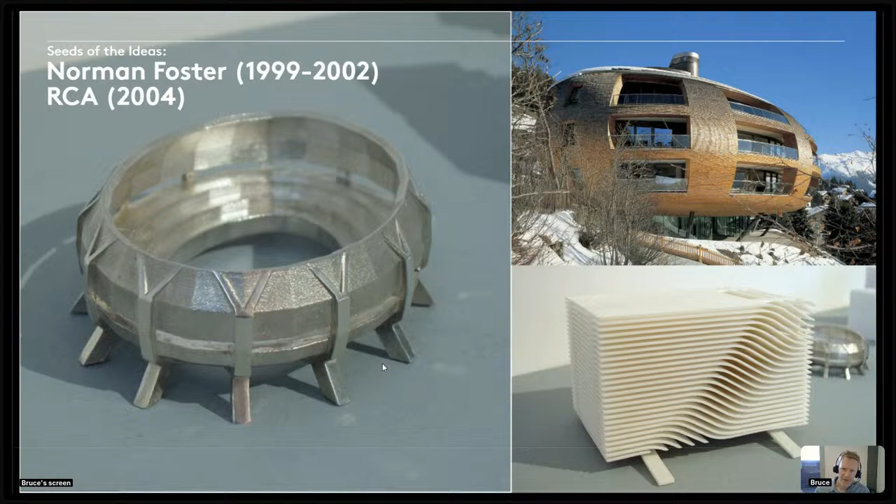So I'll talk to you a little bit first about how we got started. I actually originally trained as an industrial designer and started working on products and manufacturing processes in my BA. But my first job was at Norman Foster's Architects in the late 90s. I was there for a few years using digital design, digital tools within the studio. This was one of the first projects we worked on, the Chesa Futura project in St. Moritz, which was probably one of the key projects for me - digitally designed, digitally manufactured, in this case in timber, residential as well. So this was maybe just the start of some of the ideas that were tinkering around my brain.

After Norman Foster's, I went to the Royal College of Art, where I was making products, components, experimentations and sculpture as part of the design products course there, all around experimenting with digital manufacturing techniques. After the RCA, I ran an architecture practice for quite a few years, a very traditional architecture practice.

We decided at that point there were some opportunities for the use of digital manufacturing in homes. So this is me back in 2007. This is really the very first part of the process, where we built a proof of concept for using CNC manufacture for the production of homes, which was funded at the time from the GLA. We designed it all on the computer, manufactured it, and it came out pretty much exactly as we expected.

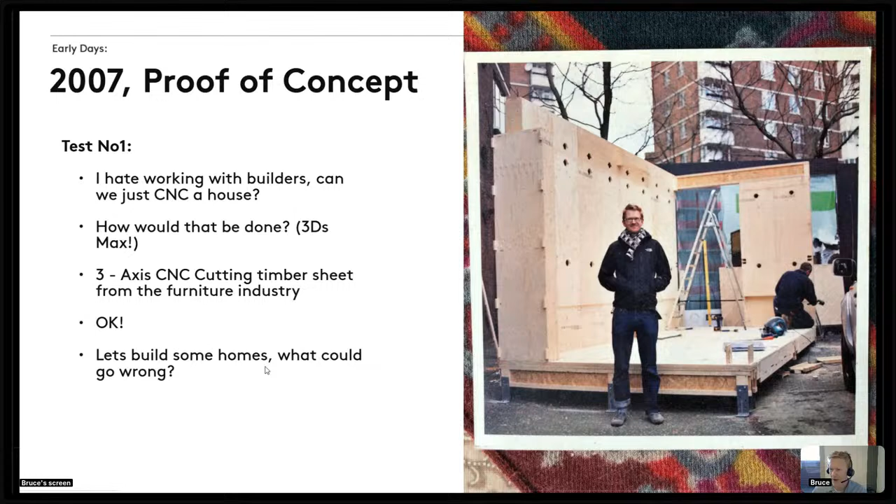From that, we decided we could try and make this into a business. We went out and got some customers, very much finding our way as we went, and decided to see if we could do it for real.

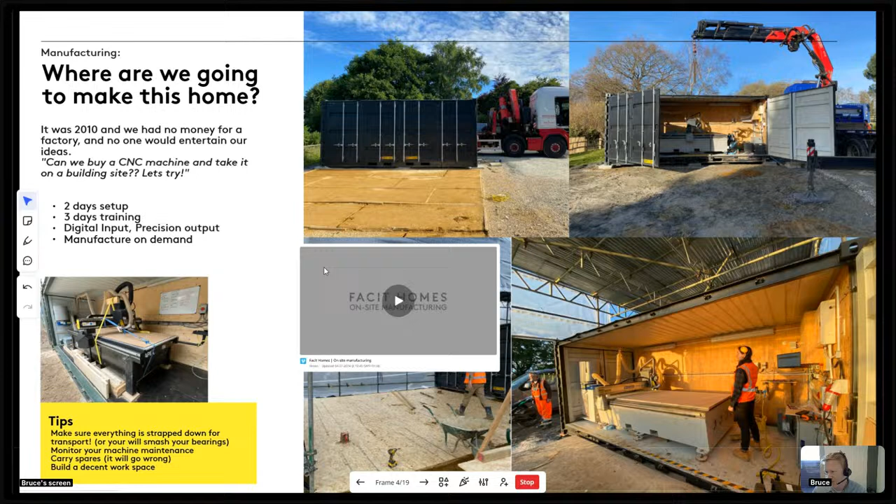Right back at the beginning, we didn't have a workshop or a manufacturing facility, so we decided to use this CNC manufacturing technology but bring it to the construction site, because we thought it would save us money on transport and shipping, and on rent for a factory space. So we've been using this on-site manufacturing process, and I'll just open this up if I can.

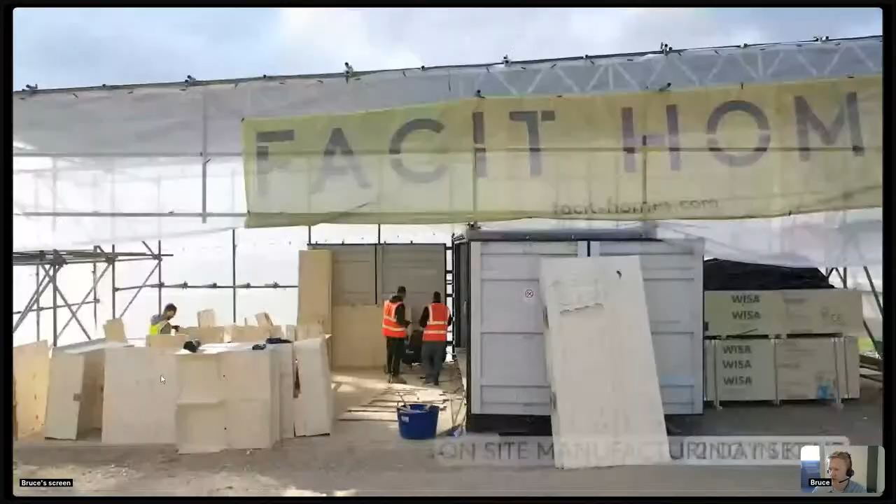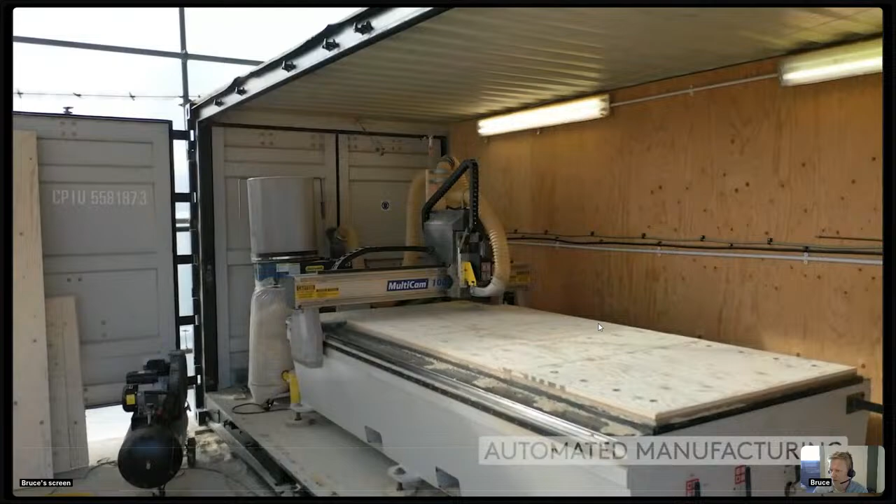The manufacturing process is: we bring the machine with us to the construction site, we drop it down, and it sits in a 20-foot shipping container. We bring the materials straight from the dockside, put them on the machine, and manufacture there and then, on demand. We're remotely operating and loading in the files from the design studio, cutting things out super precisely to 0.1 of a millimeter accuracy. It's really simple technology to use on site, so there's very little training needed, usually with low-skilled laborers.

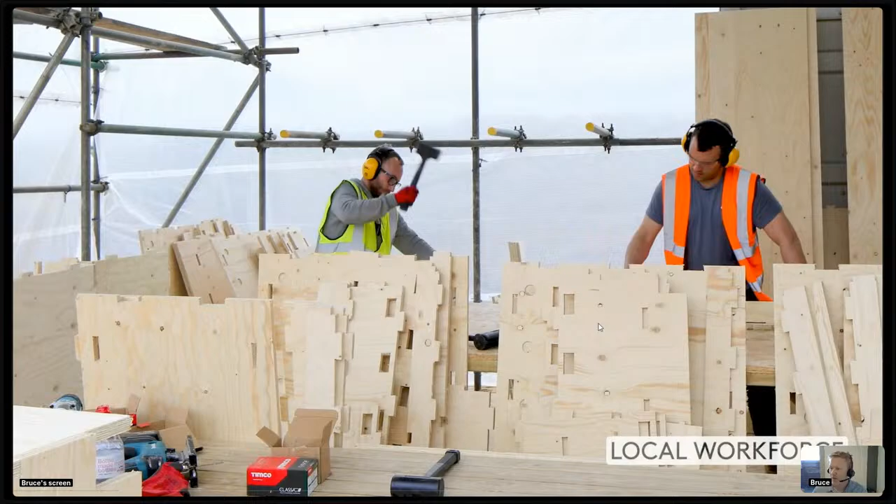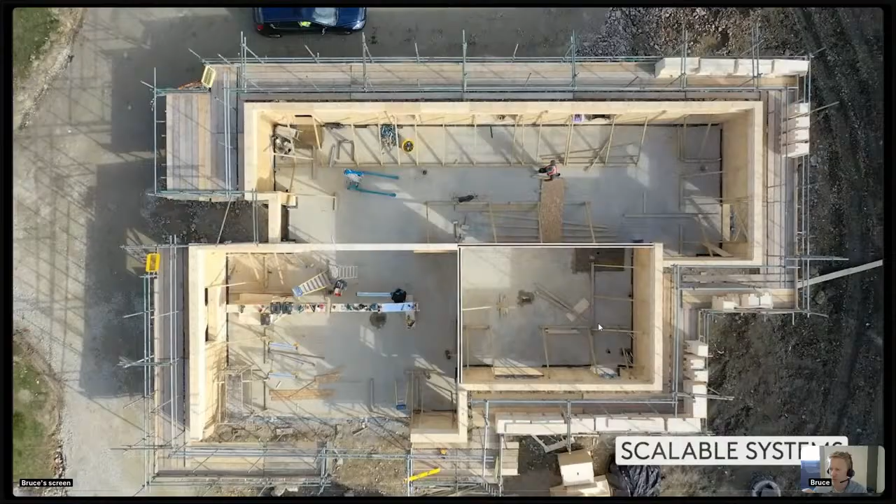We're building in a very traditional process where you manufacture and install, so you're working within the norms of traditional construction. We're very much interested in the transformation of normal processes with technology, rather than the kind of revolution where everything has to be done offsite. With this process, it's incredibly efficient, keeps costs down, and we reduce the amount of components held in inventory — we just go from machine to install.

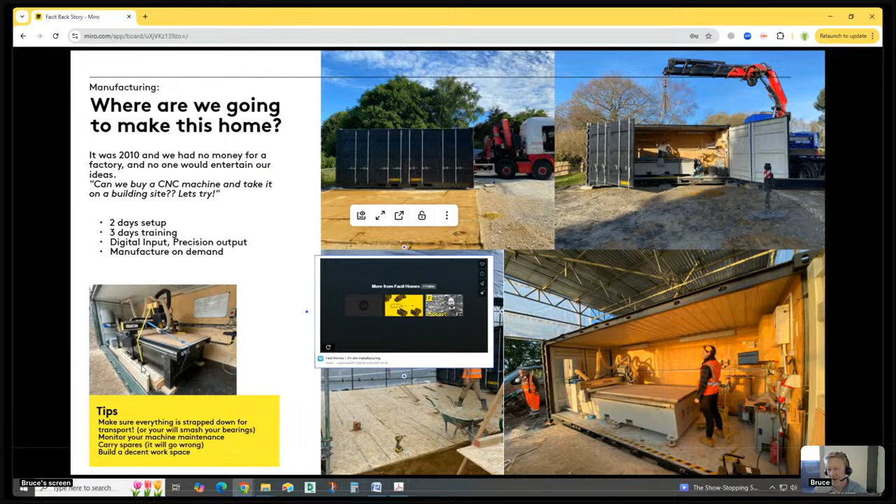This is the process we've been using on site really since 2011, and we have to deal with all the practical stuff like shipping and transport. The very first time we moved the machine, we found it had moved down the other end of the container, so we learned very quickly that you have to strap it down and make sure everything's secured.

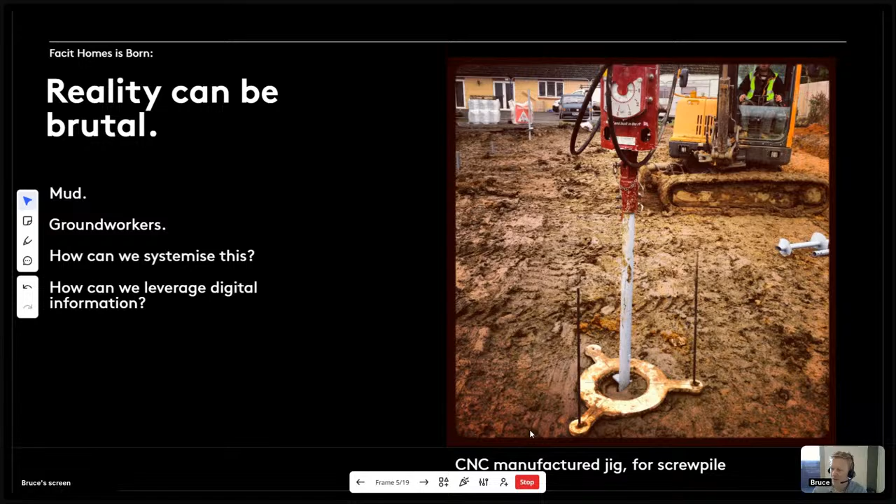From after that, other than the machining aspect, we've always had to deal with the brutal realities of construction — actually dealing with groundworks, civils and utilities. This is the jig that we made for the very first pile installation; we CNC manufactured a jig to see if we could guide the pile into the right place more accurately. We're constantly asking ourselves how we can use digital technology to improve the process.

The very first homes we did — homes 1 to 4, from 2009 to 2012 — were more collaborative working. They weren't always our designs; we were quite often working as a timber framer rather than having overview of everything. After that, the outcomes we found were quite variable — sometimes it would come out really well, and sometimes it wouldn't come out that well.

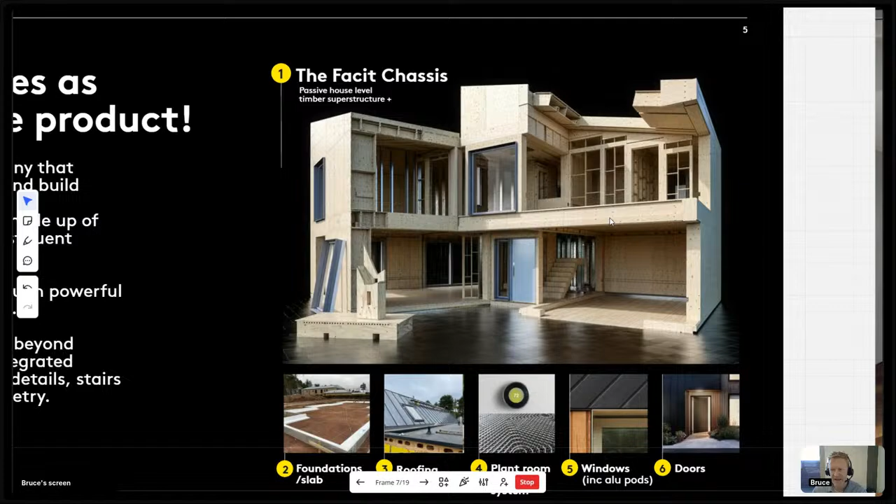So we decided at that point to take control of the whole situation and become contractor as well as designer and manufacturer. The philosophy we came upon was to add consistency, using the philosophy from my training as an industrial designer, to think of the home as a product. Every home is conceived as a holistic product, always made of the same fundamental components — same foundation system, same heating, same roofing, same windows, same door sets. In the middle, we've got the same superstructure — this is the bit we manufacture that we call the chassis, like the chassis of a car, ready for the components to fit to it.

And we reconfigure these components through the digital design tools that we use, so we don't have to have a standard typology. It's much more flexible than people kind of associate with the likes of modular construction, but it brings a lot of the associations in terms of accuracy, cost and management.

So this is home number 5, from 2013, which we really think of as the first proper Facit home. It's the first one where we were in complete control of the whole process. We had a lot of fun - manufactured cladding systems, a staircase, shading, fitted out the whole house ourselves, lots of custom made items in there. And it worked really well, both as a business and as an end product.

So off the back of that, we decided to try and grow this into a more established business. At that point we were using Revit, building information modeling, but we weren't particularly making much use of it. So we decided that we would try and make more of the BIM model than most architects would traditionally do.

And we set about producing what we call engineering grade BIM - really highly tuned manufacturing digital assets that you can go direct from the digital model into manufacture with the same data set. So a single source of truth, much more accurate in terms of how representative they are for the final product, down to the millimeter, as well as all the parametric aspects that come with the BIM.

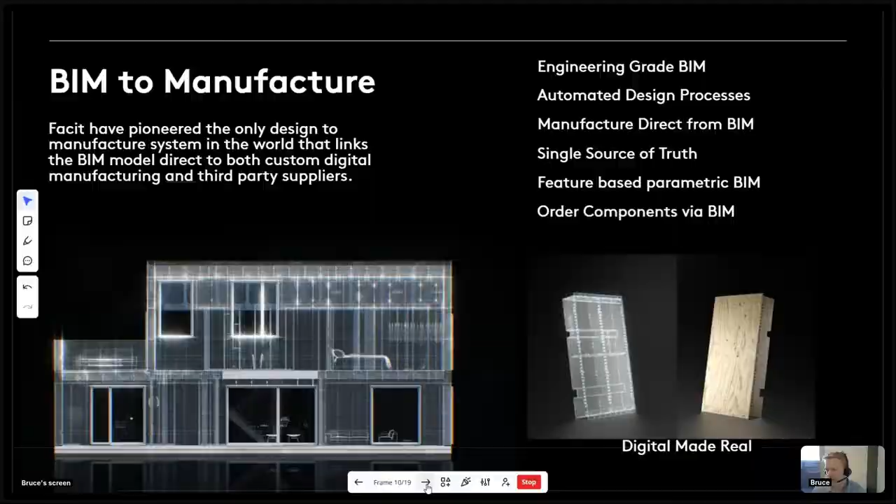So we're able to downstream all this information from the BIM model directly into manufacture, and really go from that digital to a real physical component as directly as possible. Over the years we've produced thousands of different types of components - we've cut 37,000 sheets of plywood, at least 20,000 hours of research and development.

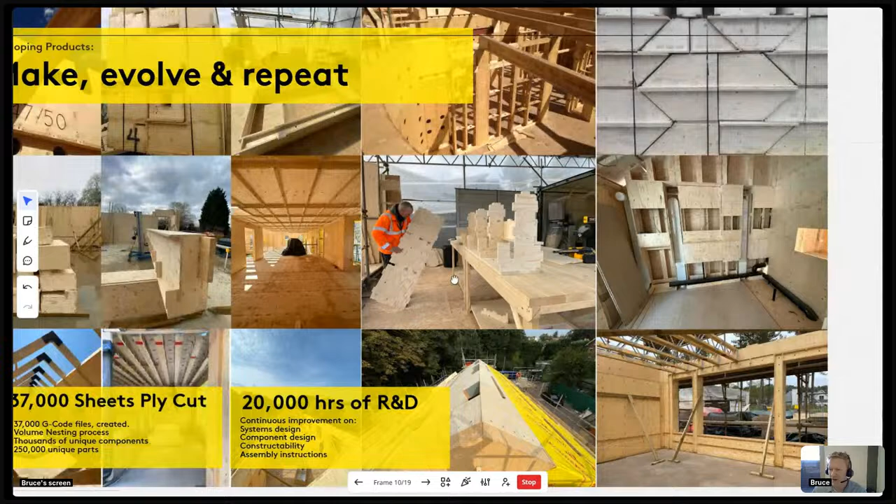And the way we operate is to try and use the system to determine as much as possible all the other components around it - much like that's why we call it the chassis. We're thinking of it more as a philosophy than a specific building system. So we're able to modify the components to whatever particular style or junction or open panel or closed panel it happens to be. We're constantly evolving it as a methodology.

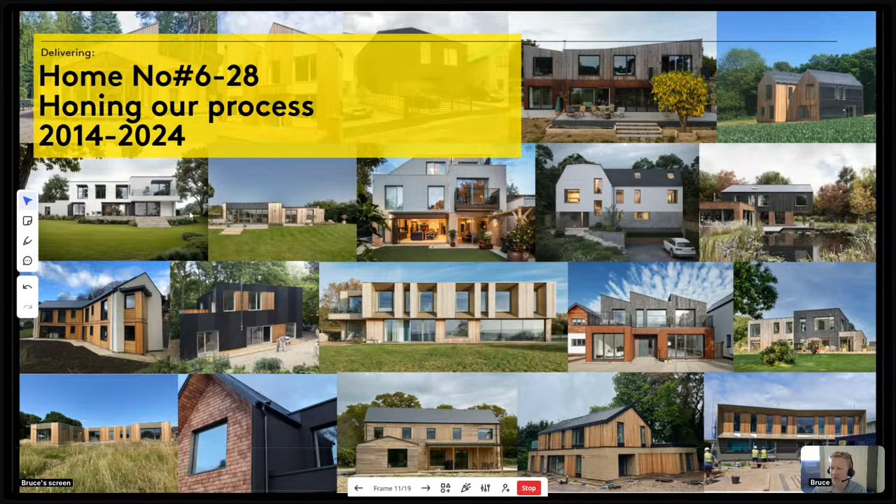So these are homes number 6 to 28 - this is the latest cohort, if you like. We've been building all this time, trying to constantly improve our processes. But you can see that each house has got a very unique look and feel to it, where they've been designed specifically for the site, and the technology wraps around the design requirements rather than vice versa.

So we can think of the house and the design requirements, the site requirements, the customer, and make sure that each house is exactly as it needs to be and not be defined by our tools, if you like.

So we've also during this process had to deal with all these interiors as well - actually contracting this, choosing the specification, understanding products, installing it, dealing with the reality of defects and finishes and good quality items. We always think about how can we use digital technology to improve these processes, with a quality control process or a standard way of contracting or tendering, whatever it happens to be.

So again, you'll see there's a lot of different varieties of style and aesthetics, which is broadly driven by the client. But the way that we approach it is that we can accommodate that.

So sitting beneath the way we operate are a bunch of systems that we've built. We have a really accurate costing system that costs within 1% accuracy. We've got a remote management system because, unique to us, we manage projects and deliver all over the UK from our central headquarters - we've built up in Scotland recently, over in Suffolk, Chichester, all over the place.

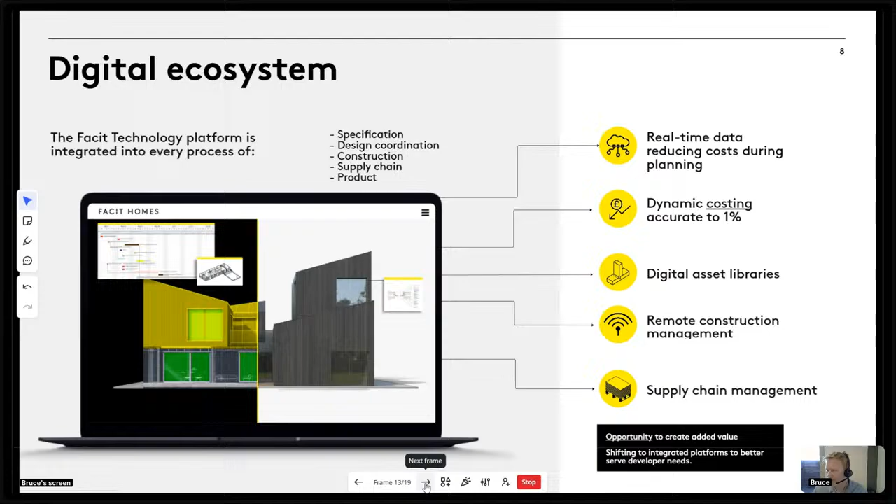We've also had people, particularly back in the day, asking us why would you be manufacturing on site? That's crazy, it doesn't make sense. And actually, we spent a few years manufacturing in a factory, and what we found is we spent most of our time stacking, tessellating, shipping pallets of components, handling them, unhandling them, and then having sites littered with too many things. So actually what you build up is a lot of inventory and a lot of physical stuff that you've got to manage and physically move around.

The beautiful thing about on-site manufacturing is it just removes all of that stuff - you literally just go from the machine to installed. You don't have the thing hanging around for a while that you have to deal with or ship or think about. So we really understand the benefits of on-site manufacturing. The on-site manufacturing could be local as well - sometimes it's not practical to have it on-site.

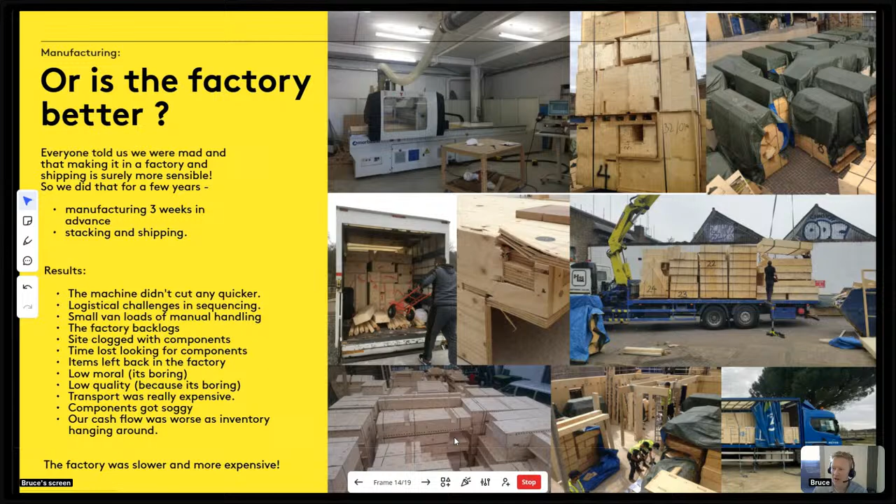We've also done a lot of experimentation with civils, groundworks, foundation systems, slab systems as well. And we're constantly thinking about how can we get accuracy out of it, how can we use less concrete.

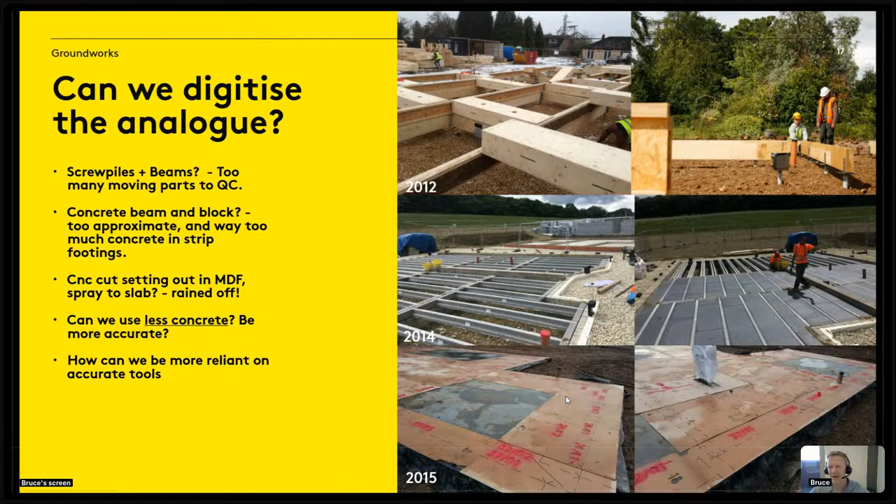This is interesting, a system we use where we cut through a template to try and mark on the slab. That was back in 2015, and it's been superseded actually. Just recently we tried out the HP print system, which Ollie might mention later. But it's the idea of how do you get this design information physically down onto the site, be that a cut, built asset or a drawing bit of information.

The foundation system that we now use is a super insulated raft system, and it's very simple and accurate. We're often thinking about that relationship between the design details, the product system, its constructability, and its quality management as well. So all of these things come into play.

This system we like because it's very clean, easy to understand. The drawing information is also very clean, and this is one of the drawings compared to other foundation systems we use. This is relatively simple, and if it's simple it's easier to spot errors. There's less chance of it being constructed wrong, because at the end of the day humans are putting this stuff together, which is fallible.

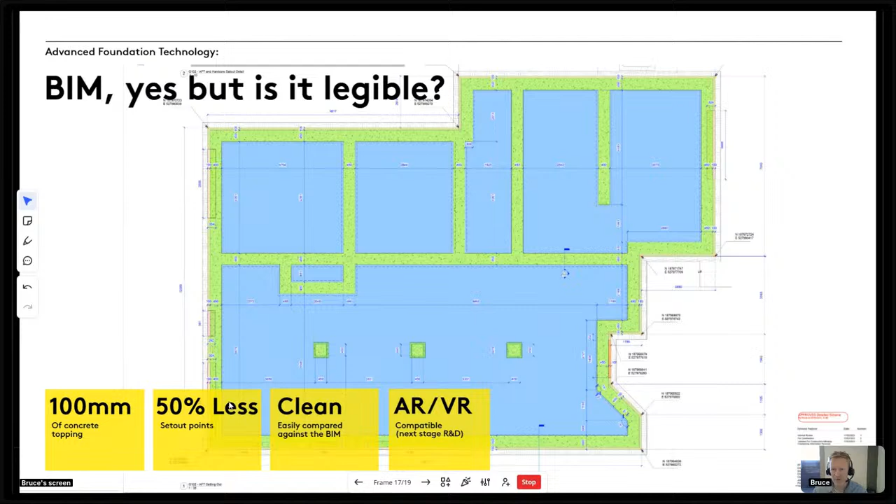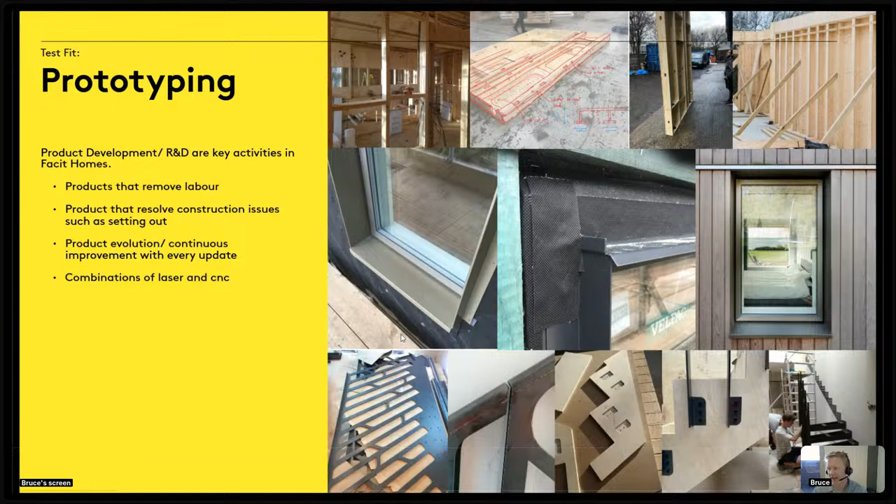We do a lot of leveraging of the digital design files for other manufacturing as well. So we'll do aluminium window pods, staircase details, custom made components. We do a lot of metalwork fabrication, and we have a metalwork company we work with who will send our laser cut nested files, which come straight out of our production system. We send it to them, they'll cut it and then fold it according to the crop marks that are already on it. So it's our product made with somebody else's machine, as opposed to our product made on our own machine.

So the business today, very broad overview: we've done £30 million worth of construction, 28 quite large properties, that's 74,000 square foot of home. We'll generally do them at about half the time of a traditional contractor.

Particularly the speed where we really win is the time it takes to go from planning permission to putting a shovel in the ground. Often people miss how long it takes to do your technical design, choose a contractor, negotiate, mobilize, realize it's too expensive, redesign. Our process is designed to just shorten that down to the absolute minimum.

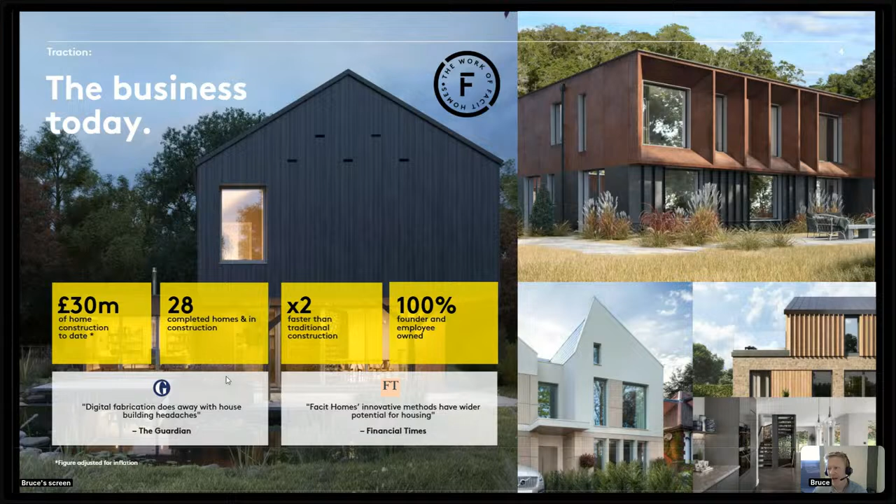So that's broadly what we look like today, and that's the quick backstory of Facit, if you like.

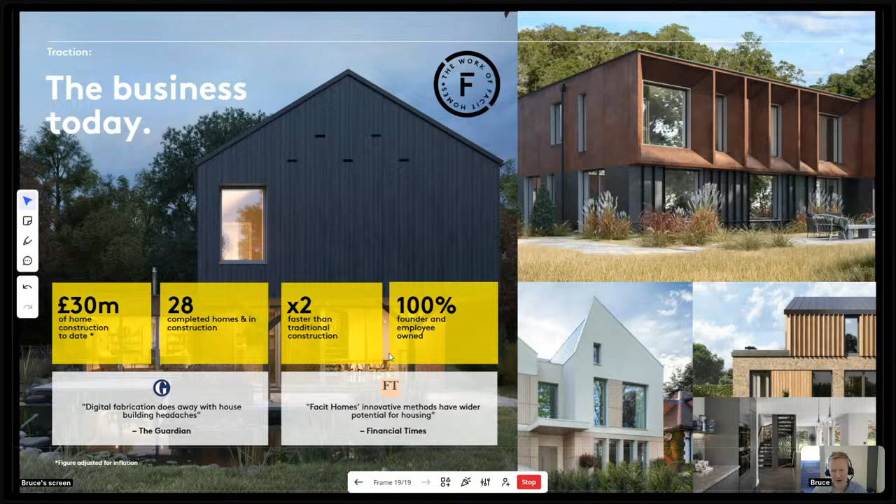I think I'm going to flip over to you now, Ollie. Yeah. I'm just gonna hang on, let me share my screen. Do a little flipperoo. I'm also producer whilst I'm doing this.

Yeah, so I think, what Bruce was saying, I thought I'd add this, Bruce, where I'll just talk about one of the things I really like about this is seeing how you go from design to the actual construction, it's incredibly accurate.

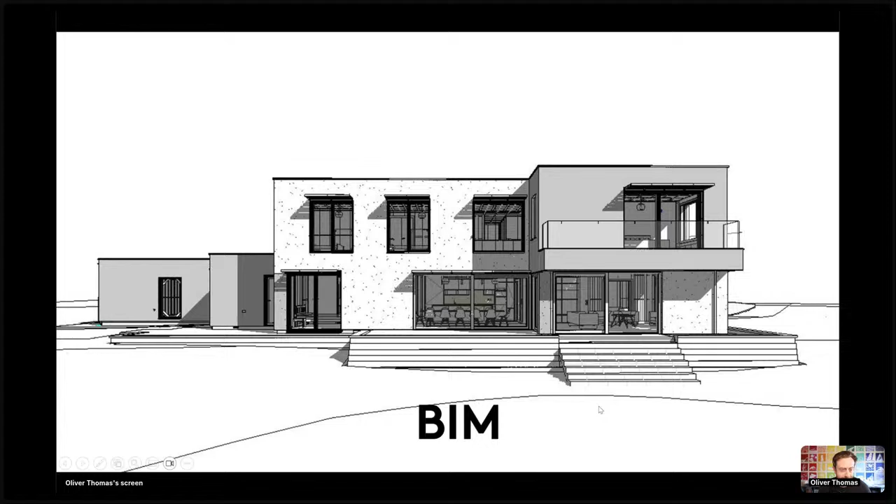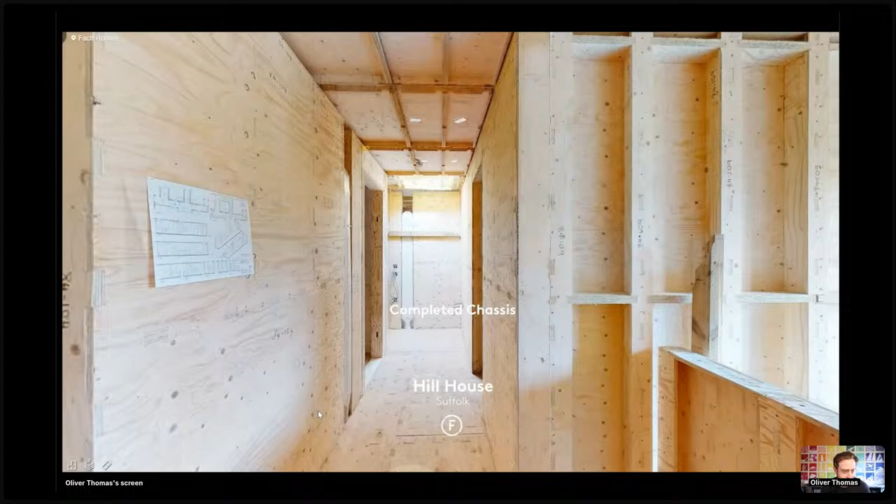And then you go to the completed project, and this is not a professional photo, but you can see it's almost a one for one, which coming from a design firm going into construction, that's very rare, that your render to reality is so accurate.

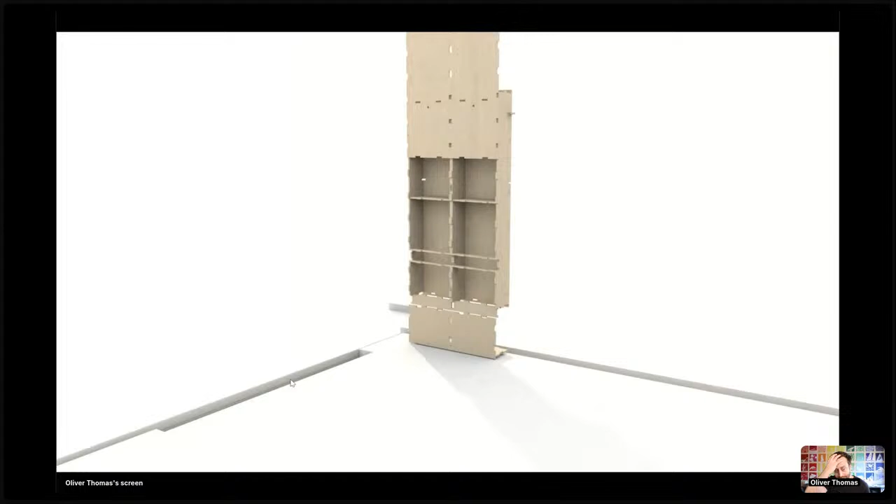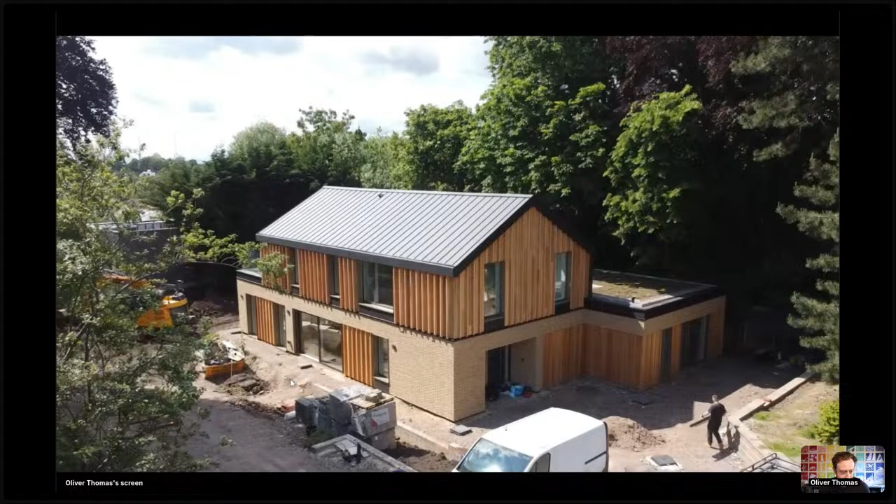I also really like shots like this where you go all the way from the logic of the component to assembling the entire frame, and you go again from render to reality incredibly, there's almost no difference, right? Because we're solving so much of it in the BIM process.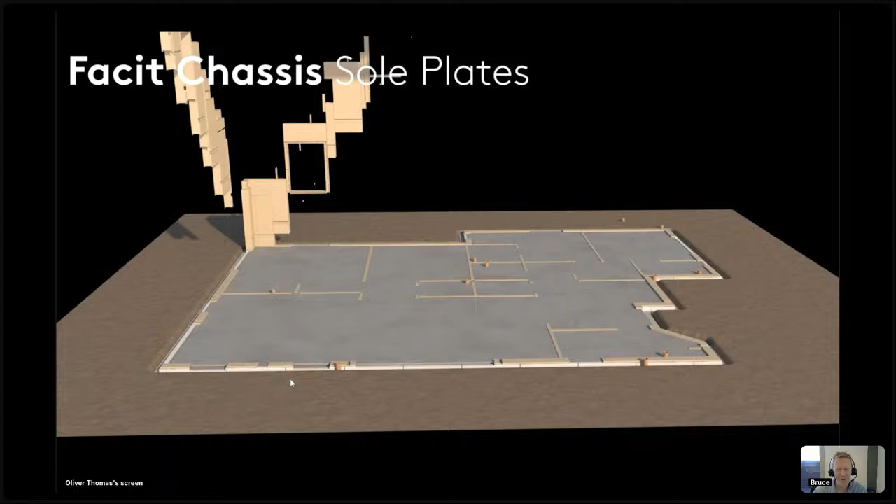It's quite ghostly sometimes when I go and visit a project and I've never been there before, but I know the house intimately, down to millimeter precision, because I've looked around the model so many times.

And this is the process. You can see the foundation system, the components, the waterproofing, and cladding. We can essentially do whatever.

So, at Bruce and Facit, we've developed this technology over the last 16 years, and we've kind of perfected that process and our technology, and we're now scaling it to a much larger scale. This is where we see we can be building much larger developments, multi-unit schemes, and essentially we're transforming to become what we call a tech-enabled home builder.

One of the questions is also why, and the context we're doing it in. Here in the UK, and the sentiment is pretty much the same globally, the housing and building sector is going through a crisis. Traditional construction is really struggling. It has a real labor skills shortage, which is making building more and more expensive. They haven't really been adopting technology, so there's a real struggle for traditional builders to scale and meet the demand for housing.

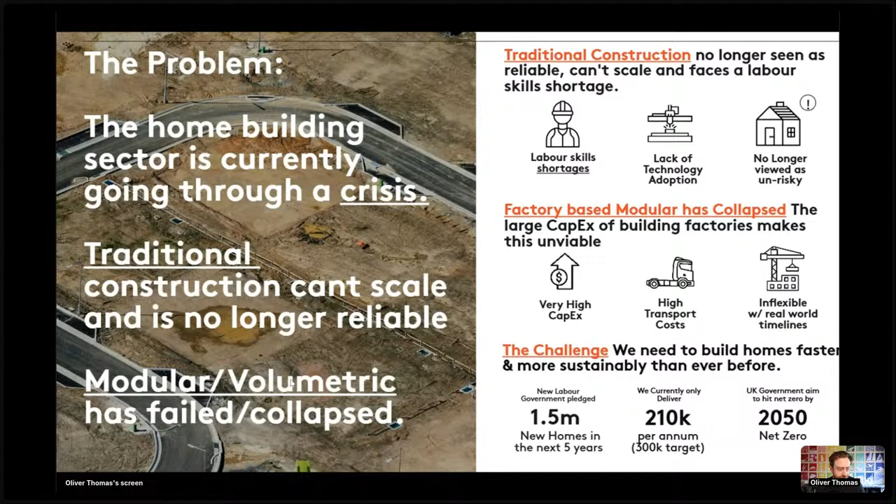At the same time, we've had this new world of modular and volumetric, which in the UK has completely collapsed essentially. Builders build a giant factory and assemble a big chunk of the building. Typically it was volumetric, where it's almost like a shoebox of a house gets made in the factory and shipped to site - that has just collapsed.

The fundamentals of it don't stack up, and this isn't just a few companies going bust. We're now in the double digits of companies spending hundreds of millions of pounds setting up a factory and going bust essentially.

So we face this future where we don't really know what the next thing is in the housing space. We need to build more homes than ever before. We need to build them more sustainably than ever before. And I think Facit have been slowly and quietly disrupting this space, proving the technology is scalable and actually works from a business model perspective.

We see our solution as becoming a tech-enabled home builder, where we have a fully vertically integrated home building platform that we can either use internally or work with other people to enable them to build with our technology. So we have this complete end-to-end solution from design all the way through to construction that enables you to build faster and cheaper than with traditional or modular construction. And most importantly, it comes at a fraction of the cost of your traditional fixed factory, which we'll talk about a little bit more later on.

And of course, this is what scaling that up looks like. So that same diagram we just looked at, we've got the same kind of raft idea - we have our components going on, but now in this case, this is a multi-unit scheme, one that we'll show a little bit later on. The same exact concept applies - same products, same windows, same doors go in, and we can clad it in whatever we need to.

So part of this process is also continuing to digitize as much of the design-to-construction process as possible. This is automating our DfMA process, which is going from BIM to manufacturing, which is now almost fully automated.

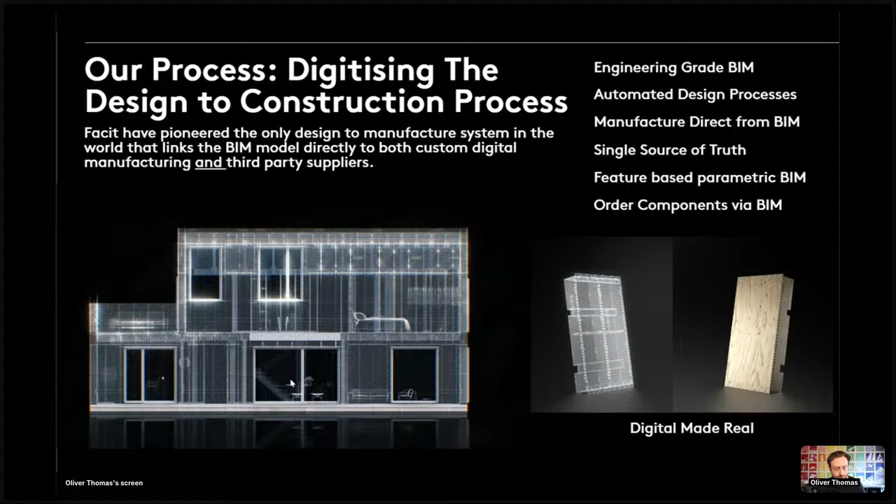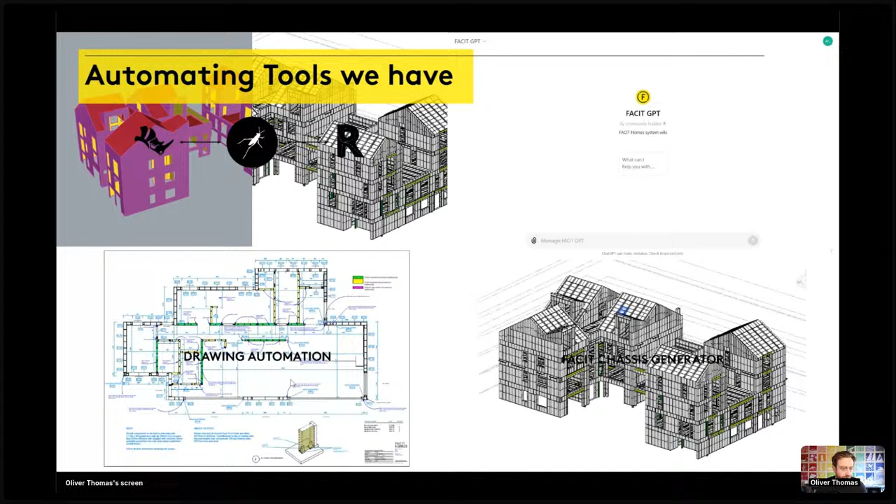We're also now experimenting - and this is kind of partly where I came in at the beginning of my time at Facit - where we're asking what automation can we do on the tools that we have. How can we use Rhino Inside to do drawing automation, to go from a design model into a Revit model really quickly? Can we populate our chassis automatically, essentially? Can we go from a surface model all the way to a detailed model and speed up the design process?

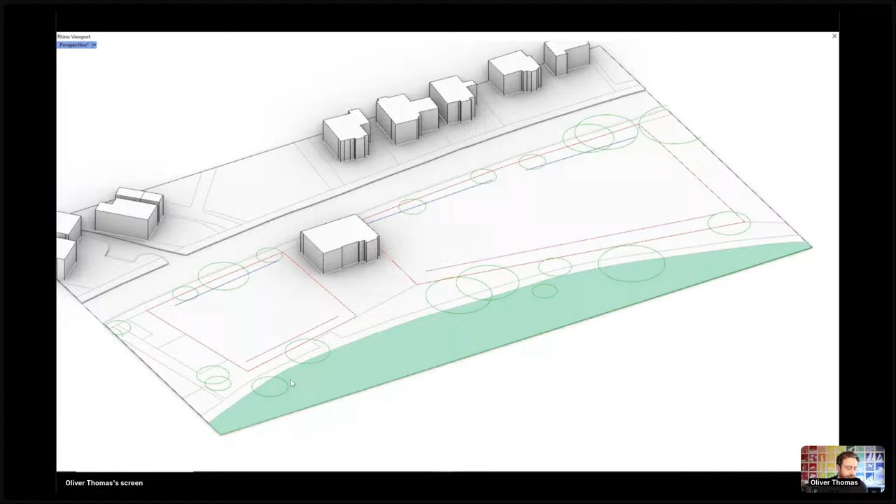We've also been in really experimental phases of creating prototypes in Grasshopper to look at development feasibility - what does it look like if we put rows of townhouses on a site, and how much is that going to cost?

How much GFA does it give you? We work with developers in the early stages to look at the feasibility of a site, like what can we do, and putting a Facit development on your site.

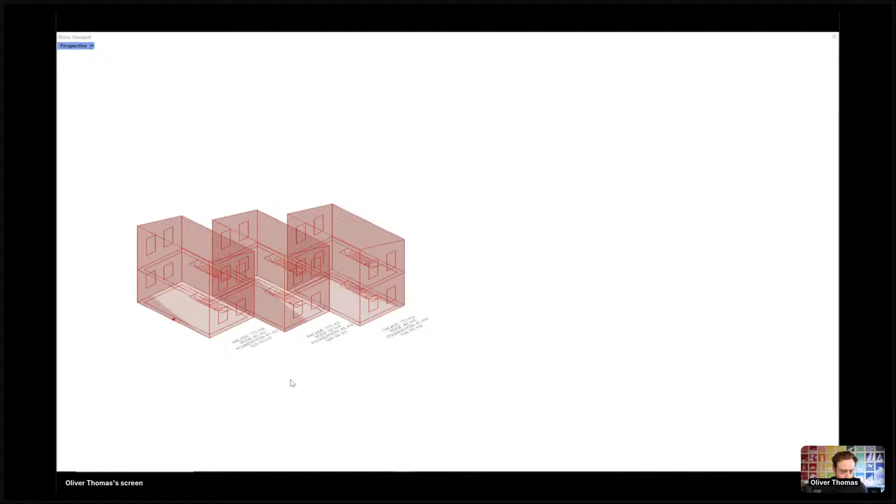This continued with slightly more detailed studies of townhouses. So how can we create a configurator for townhouses that enables a bunch of different configurations? This gives us a base which we can then pick into and create custom elements within the design manually, but it still significantly speeds up the beginning process where we're costing and looking at the feasibility of sites and experimenting with different types and forms.

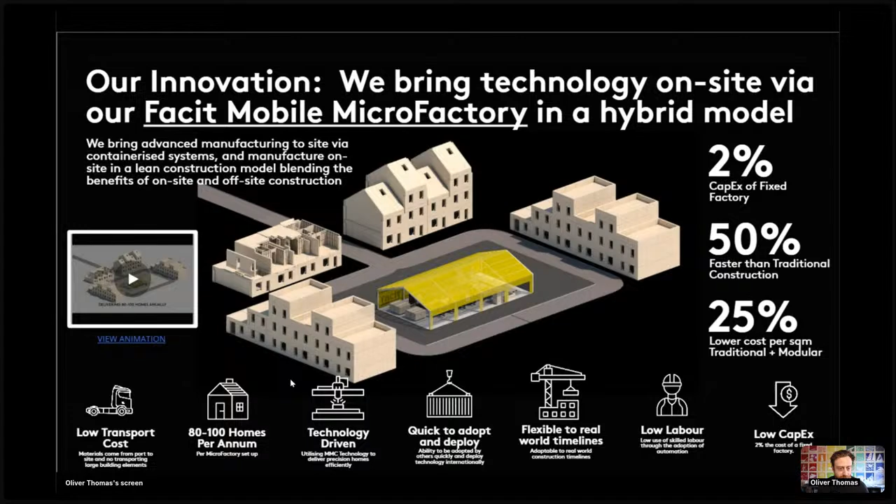And of course, the other part is scaling up our key innovation, which is our Microfactory. The video that Bruce showed you is essentially our Microfactory 1, where we have a single machine in a container. We've also now developed new Microfactories that give us higher capacity to cut plywood, which enables us to build larger buildings and build them faster. So now we've developed 3 Microfactories.

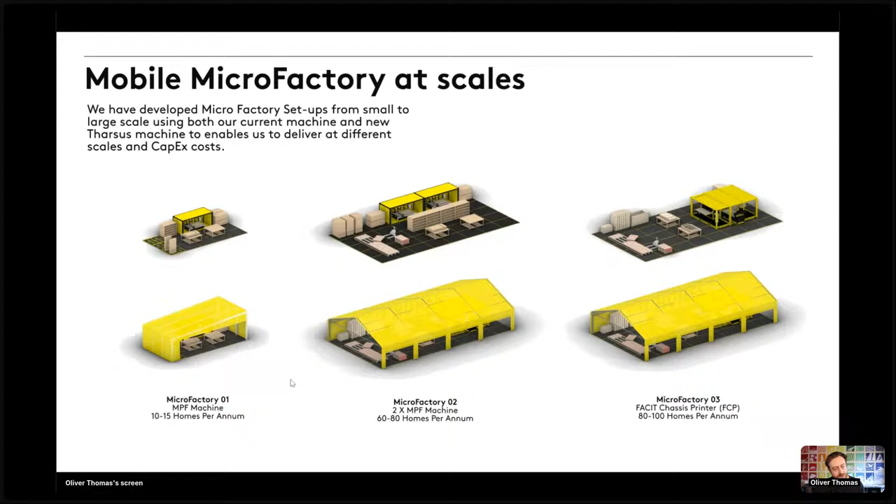Microfactory 1 is the one that Bruce showed you, which we currently use for our homes. Microfactory 2 is essentially 2 of our MPF machines in a larger Microfactory dwelling, where we've got improved assembly and sub-assemblies, so we can use this today with our existing technology to build larger products tomorrow. And then we've also developed a Microfactory 3, which I'll show you, which is in partnership with Tharsus, that essentially adds automation around the machine.

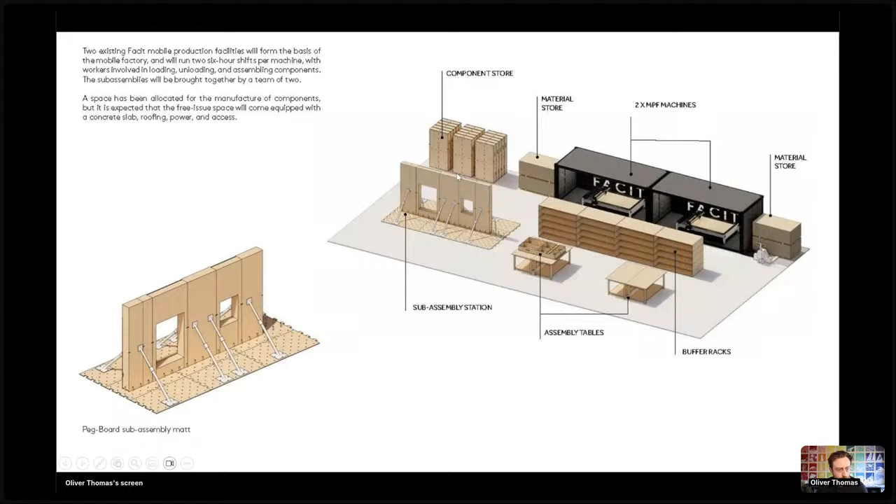Our Microfactory 2, looking at it in more detail, we have 2 of our containers. So our CNC machine in a container here is essentially a way for us to brute force more cutting power. We have multiple assembly tables, buffer racks so the machine can continue cutting, and sub-assembly stations where we can conjoin components into full wall buildups and speed up the assembly. We also want to look into how we can put membranes on the floor, windows on the floor, so we're not double handling these materials from the ground up to the second floor, and install it on the building.

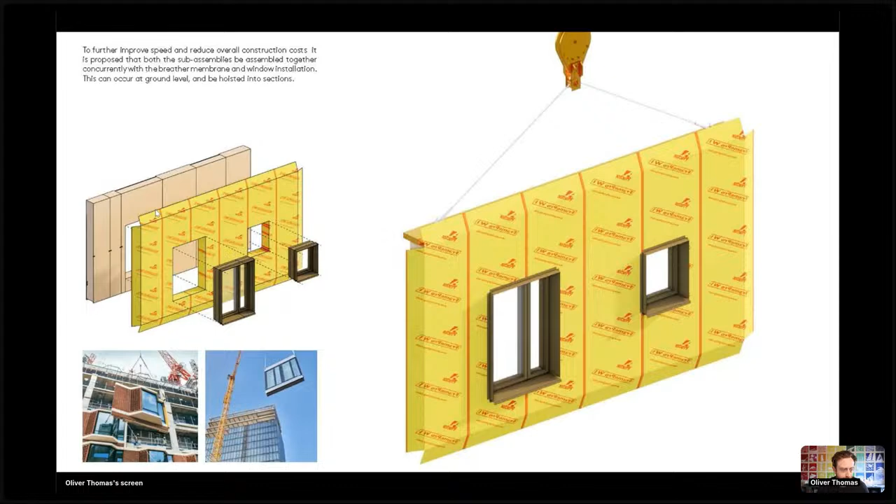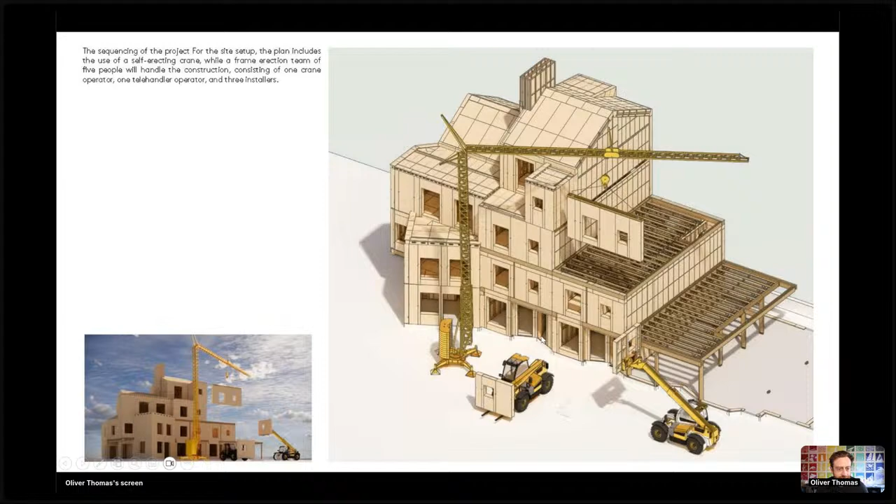Can we assemble it much like you see a curtain wall facade being assembled? So we're also looking at small cranes and things like that, which are really quick to deploy, to enable us to assemble the building quicker.

The new machine that we've developed is in partnership with a company called Tharsus. Tharsus is an automation robotics company in the UK, and we've been working with them to essentially automate our machine. So now we have a 3 container system. We still have our CNC machine in the middle, but around it there's a bunch of automation, which I'll show you in a bit. This even further increases our cutting capacity and cutting speed, and essentially the machine can just run overnight.

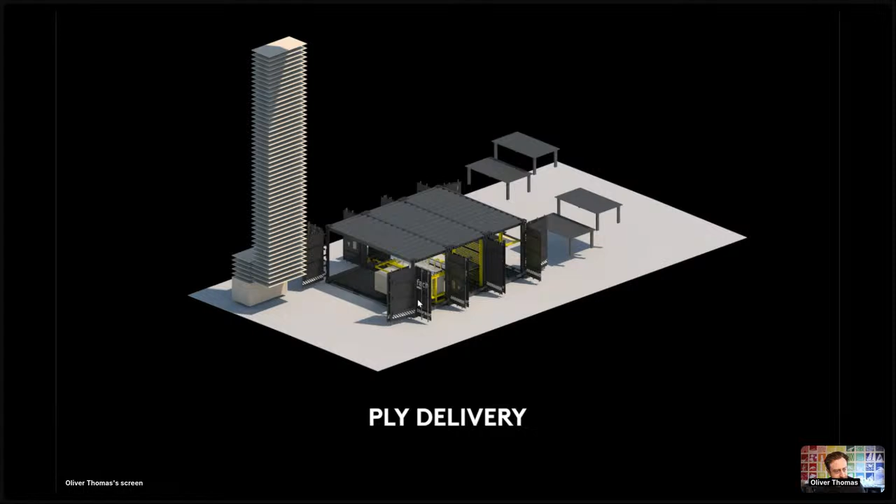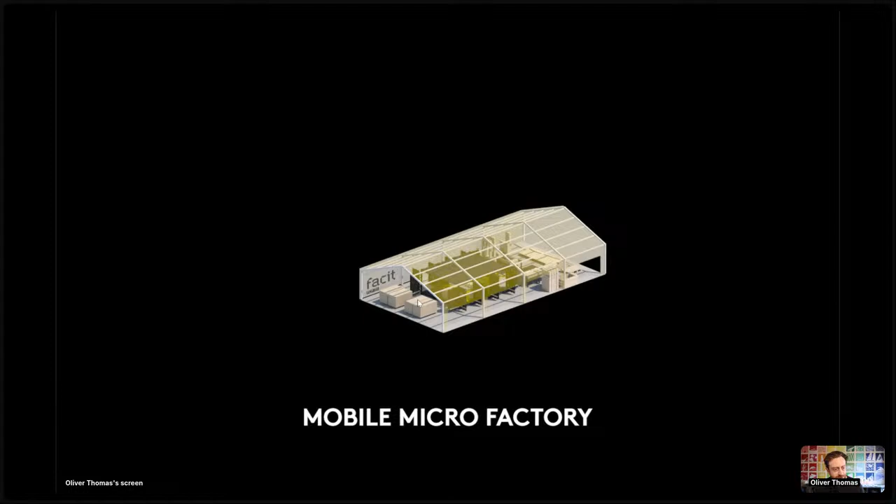And so this third Microfactory that we've developed looks like this. We have a 3 container system. The containers join together, each one housing its own specific thing, but the idea is still the same: the materials come in, the plywood comes in, it goes through the machine that produces the parts. The parts get assembled into components, and then components get assembled into sub-assemblies. The microfactory is deployed on or immediately adjacent to the site, as close as we can get, so that we can go from manufacturing to assembly in the shortest time possible. Each of our new microfactories, the third ones, can deliver 80 to 100 homes annually.

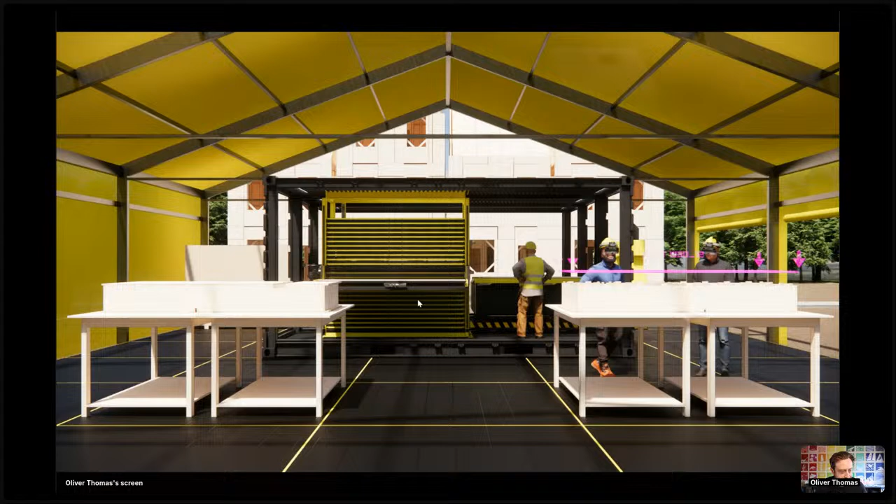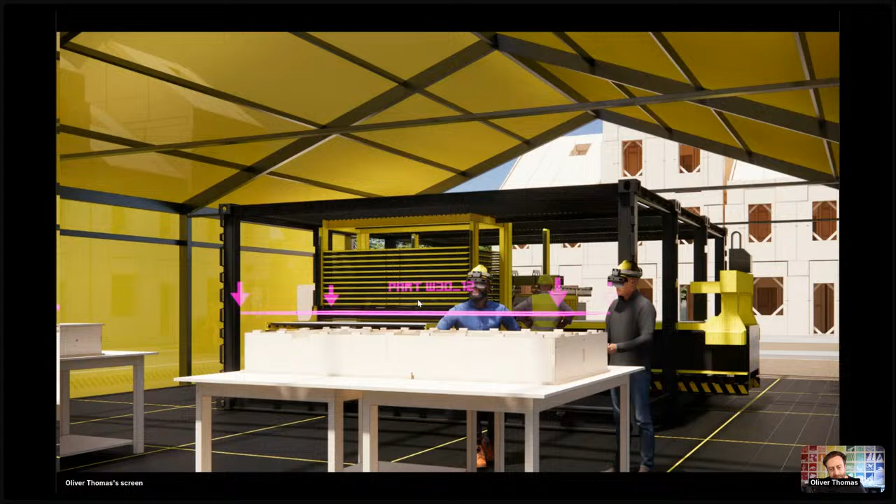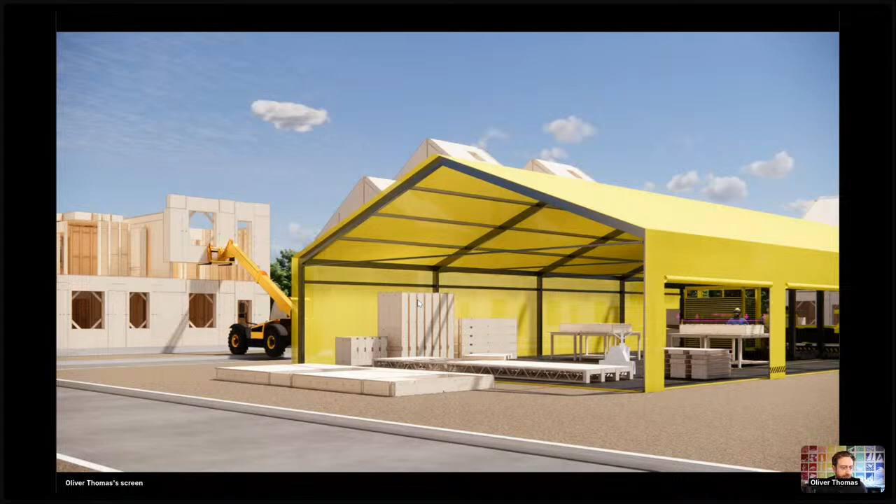To give you a little peek inside, this is our Facit chassis printer with our assembly tables, which are just assembled by hand - we don't have any robot arms or anything like that. We do want to use technology that we think is adaptable to this space, so augmented reality - can it help train someone to assemble their first few components quicker, or aid them in scanning a QR code or whatever it is? We can go from components to sub-assembly. You can see in the background here we can actually put larger building elements onto the building and speed up the actual process of assembly. It's essentially bringing more and more technology to the construction site to speed up the process.

The new machine that we've developed looks like this. So in the middle, we still have the CNC machine, but around it we have a 2D print system, material loader on and off, and a buffer rack. The print system actually enables us to put instructions on the faces of the components. The CNC machine does its thing.

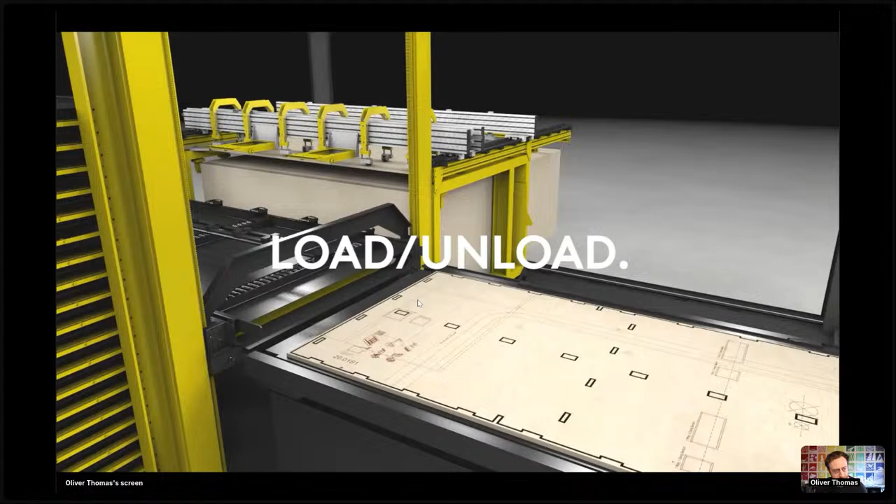The material gets loaded on and off automatically. And we have a buffer rack, so we can essentially cut the plywood all day and all night long. It essentially adds all the automation of the manual process of our current machines.

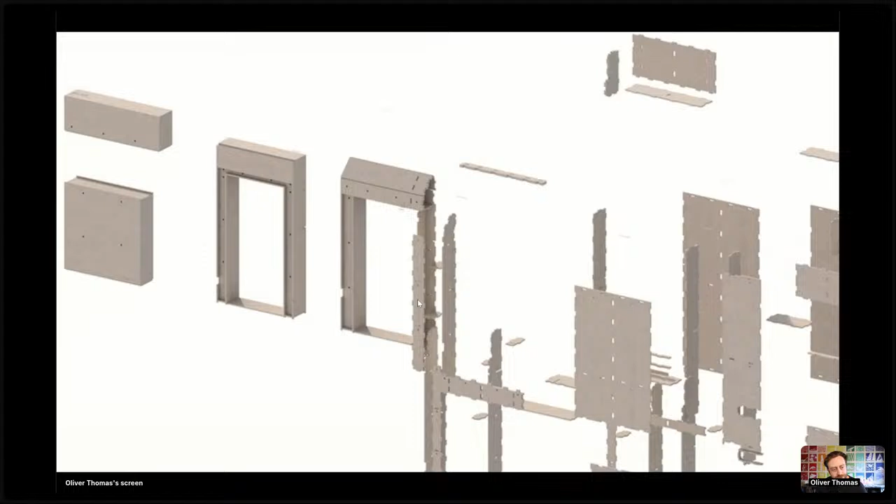When you think about our machines and the chassis printer or the MPF, it's essentially this process: a single line of production that can produce many different types of components. So we're not just producing one wall component, we can produce walls, window components, roof components, gutter details - really detailed stuff. We're able to create standard components, but we also create completely customized components.

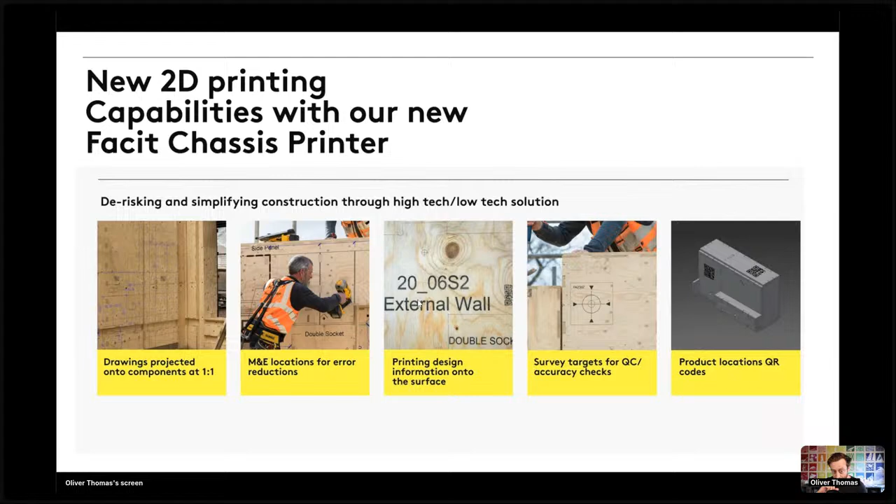The new 2D printing capabilities essentially give us this. If you've ever worked on a construction site and given someone a drawing, you can almost guarantee it will not be in the right place. So our 2D print system essentially tries to just put instructions onto the faces of the components. This opens up a world of adding QR codes or scanning things for dimensions. We're also experimenting with other people's technologies that enable us to do this.

This is the HP SitePrint that enables us to actually print on the slab as well. So in theory, we would have 360 degrees of instructions on the floor, on the walls, on the roof, to aid the construction process.

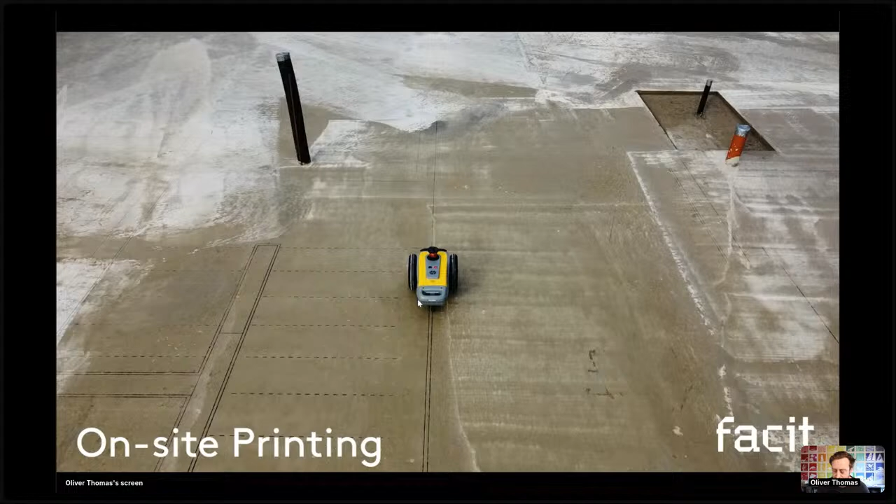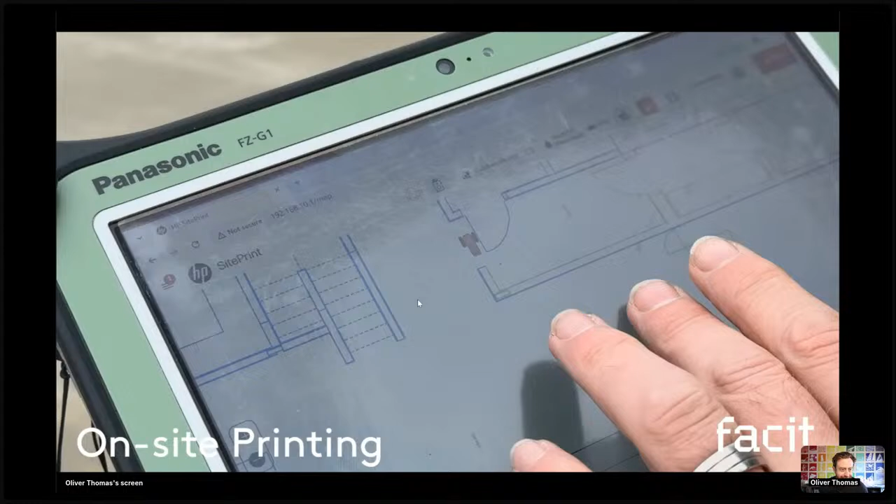As Bruce mentioned, this is something we just experimented with a month ago, right Bruce? On one of our existing products, we used the HP SitePrint to print out the layout of the building on our foundations.

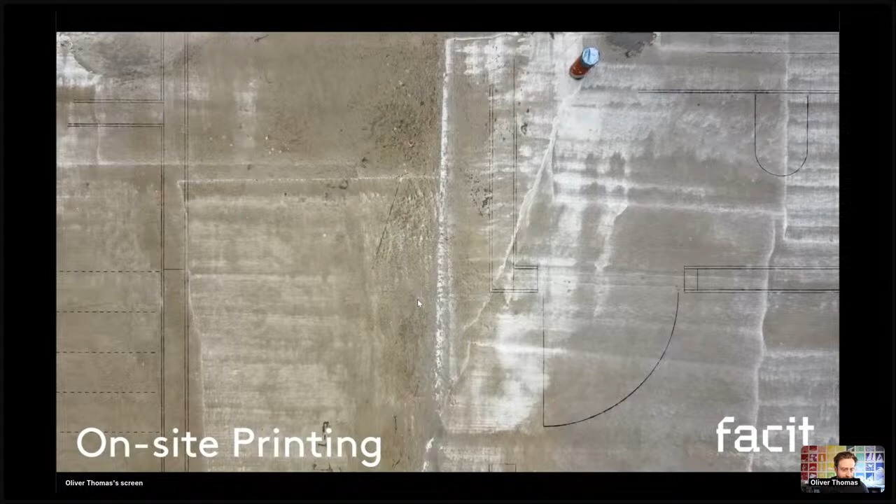Now, our foundations are pretty accurate already, but there's always going to be some discrepancy between the digital and the real. This is one of those things that allows us to blend between the foundations, which is the somewhat messy part of the construction site, and our chassis, which is incredibly accurate. This enables us to lay these things out. We think we've saved a number of days of our carpenters laying these things out, and it was a pretty cool test - definitely something we're going to continue to use.

The reason for that is most people that have built factories to build from, they just bring inside the way that we build already - the way we build walls, floors or roofs - and you end up with multiple lines of production for each of those specific things. That's why you need so much space. Eventually they assemble them into a shoebox or something, and then it gets shipped to site.

Ours is the complete opposite. We have a single line of production which can produce many different components: walls, floors, roofs. Rather than having multiple lines of production, we just have a single line, and that's what enables us to be a microfactory. The other thing which is really key is the cost.

The cost of your factory is going to cost you around 12 million quid. Each of these factories can deliver 100 homes a year. So for your fixed factory, you're spending around 12 million quid paying back finance over 5 years to buy the machinery, rent, transport, all that kind of stuff. When you think of that per home, that's 120 grand per home just on the cost of running your factory. This is why factories has never really worked.

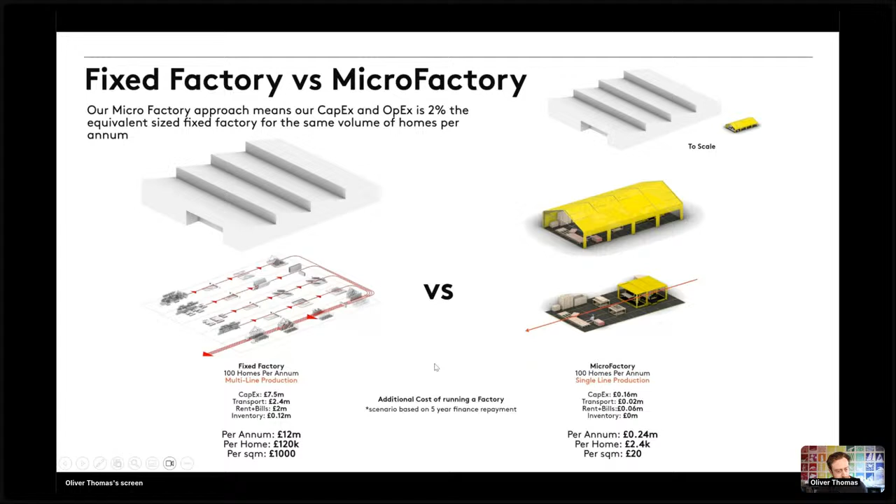So these are the key reasons why fixed factory has struggled over the years and why our microfactory approach is fundamentally something completely new. Of course, as Bruce said, we're scaling our ecosystem as well - our supply chain, our costing modeling - and we now have this fully vertically integrated home building platform. We can go from development appraisal, looking at a site that we're either going to build ourselves or working with a developer to appraise it and get really accurate costing immediately, all the way to leveraging our Facit Homes brand and actually selling it.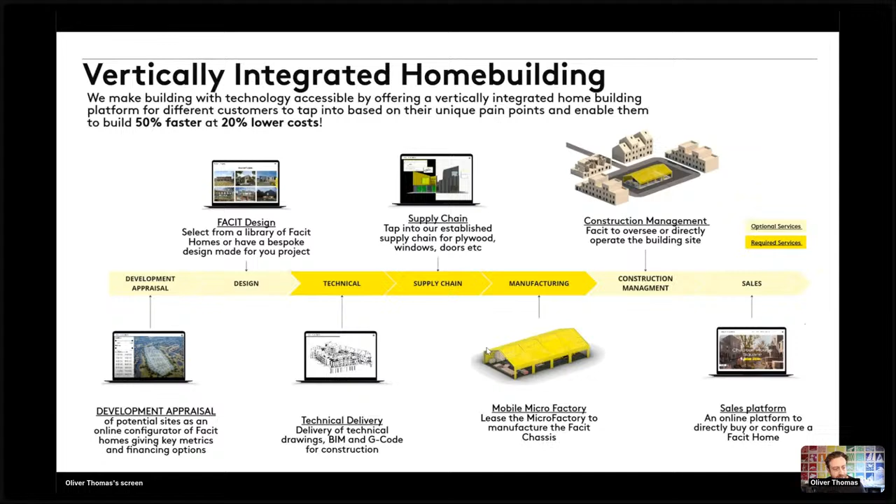We can work with other developers and architects if you have a site or design already, or we can take it from the very beginning through appraisal and the design process. Essentially, we offer a way to build that's 50% faster than traditional and modular. Where we really save time is not going back to the tender process, realizing things are too expensive, and then going back through that process.

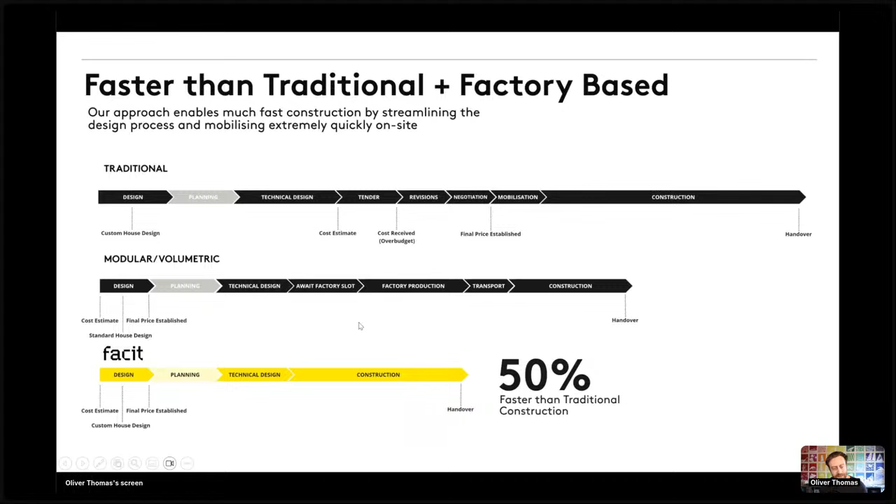At the very beginning, we know how much things are going to cost because we're the ones making them. Even the modular and volumetric guys that are left often have to wait for time in their own factory to start producing, whereas the flexibility of microfactories means we can deploy extremely quickly.

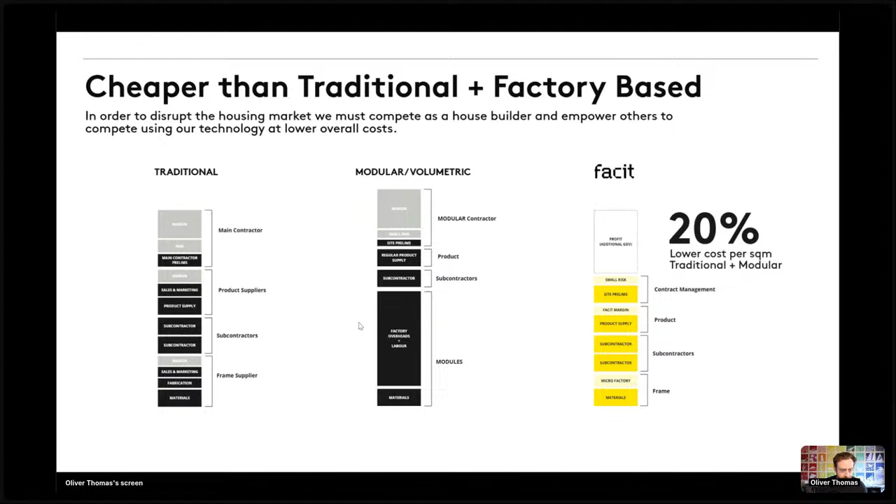We can also build cheaper than traditional and factory based methods. Much like a home builder, we have our own products, our own framing systems, our own supply chain, which we can utilize to build at lower cost, and also empower other developers, councils, or housing associations to build at these lower costs that they traditionally wouldn't have access to through a traditional contractor.

One of these is the Phoenix in Lewes, with a developer called Human Nature. It's going to be the UK's most sustainable development, and we looked at the feasibility of building with our chassis to actually build these products.

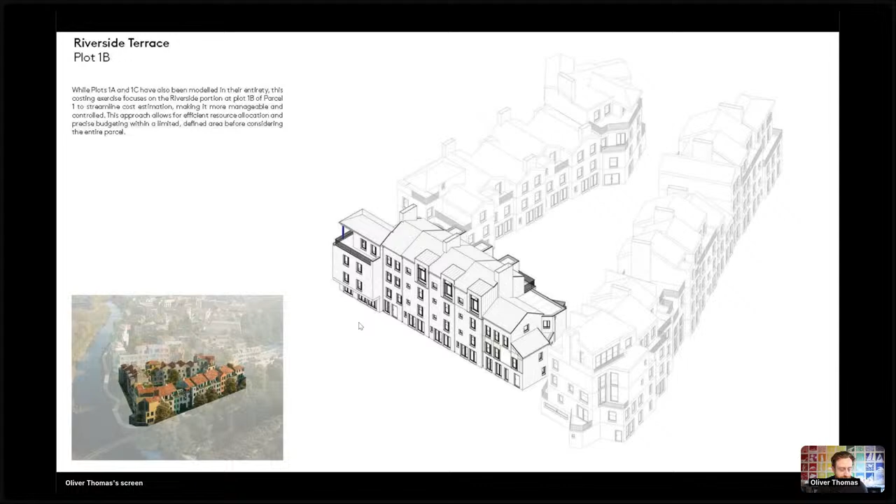Their first plot, which was designed by Ash Sakula I believe, is a really interesting scheme - a very unique, customized, higgledy-piggledy design, which for a traditional builder would be a complete nightmare. For us, we can handle the complexity, and we're able to very quickly populate the model, build the chassis, go all the way from the structure and foundations to the windows, and work out exactly how much it's going to cost.

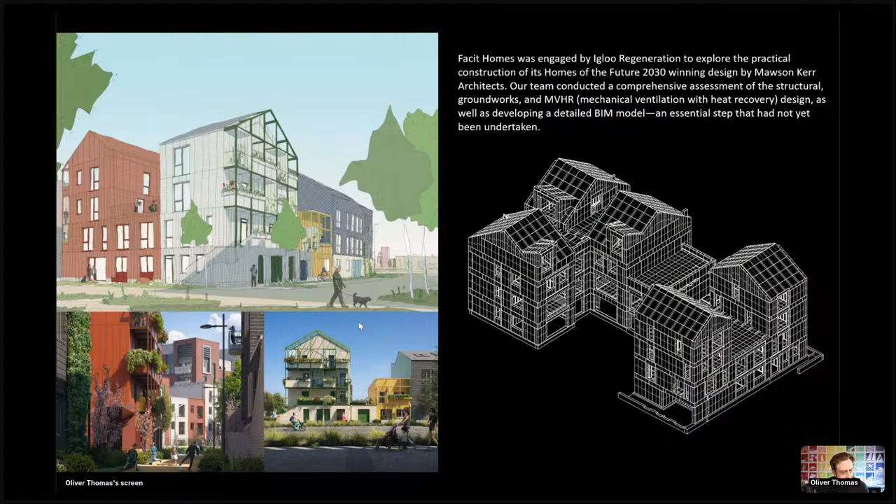Another project, Home of 2030, was the winner of the national competition for the Home of 2030. We looked at how we could apply our chassis for this new housing development up in Sunderland and build it using our system. A very similar case, also in Sunderland, is Sunniside with a developer called Town, where we looked at terraces and 4-story apartment blocks, again utilizing our system to enable them to build faster and sustainably.

A lot of these products are trying to hit a net zero target, and our building system is one of the things that will enable them to do that essentially.

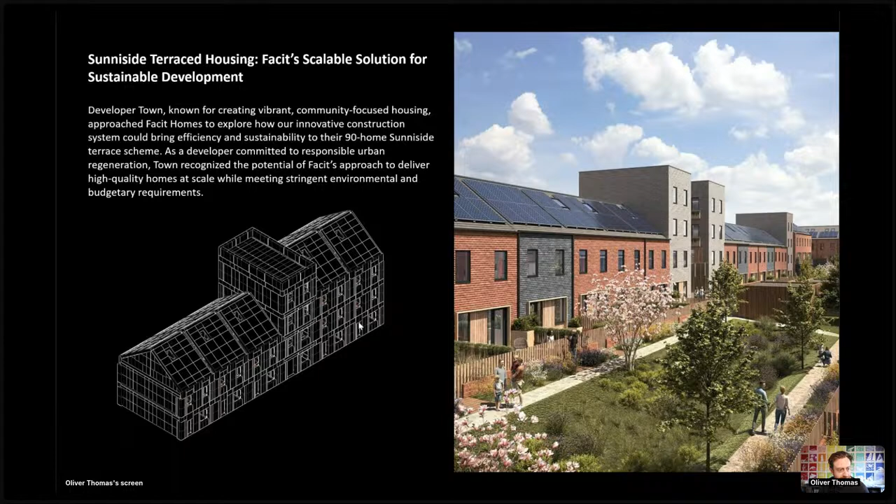Some of the products we've been looking at ourselves include a project in Bicester for 10 houses, around 250 square meters each. This is something we can deliver today with our existing technology. We can design it, plan it, do the placemaking, and essentially hand you the keys over and even help you sell it.

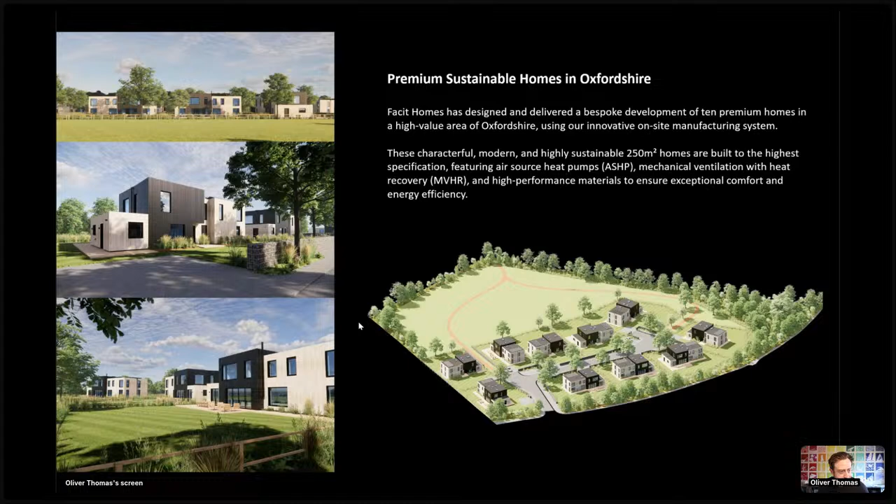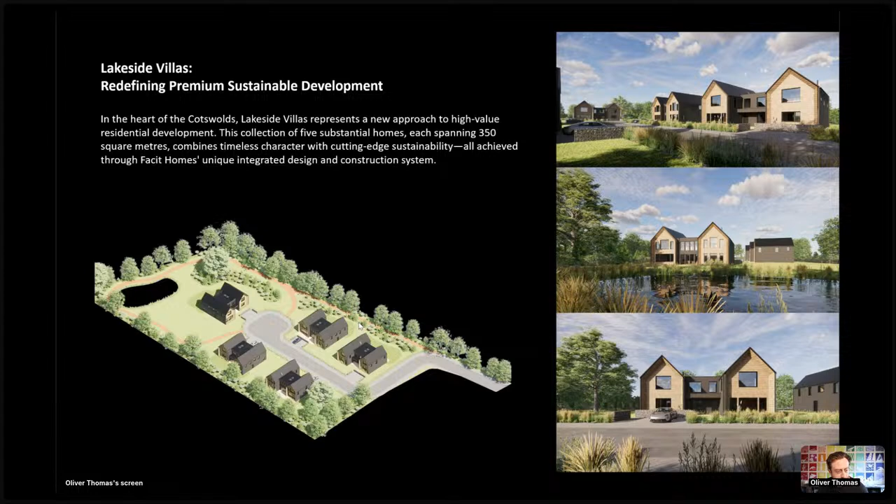For the final one, which is really where we see a huge opportunity, is townhouses in London - small plots, backland plots, or old parking lot plots. We're looking at a scheme for 27 homes of 2 to 3 story terraces and townhouses, and each townhouse can be somewhat unique or customized. We're even looking into developing our own facade systems that we fabricate ourselves, and we think there's a real opportunity for us to tackle these kinds of sites, particularly here in London.

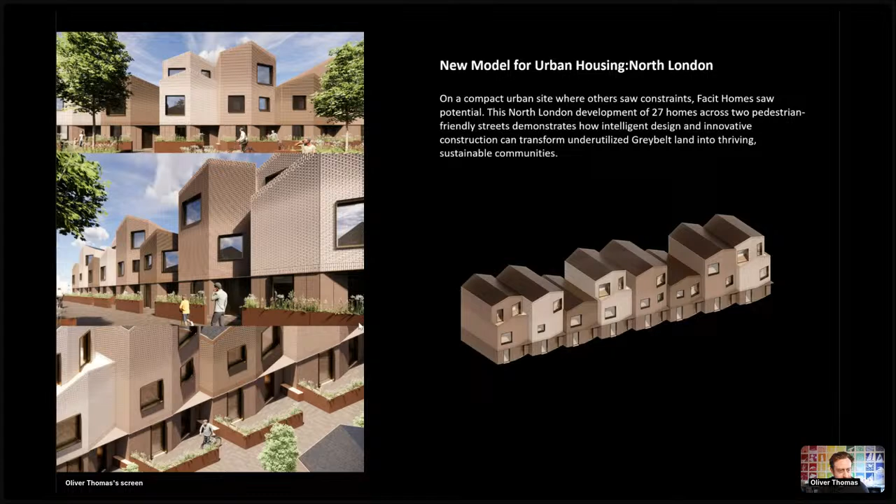Where we think we can go, our technology is literally shippable in containers. We currently build all around the UK, but our product is extremely applicable in other markets like the US, Europe, and Australia. We're also talking with a few people in the US to try and bring microfactories over there.

Right now we're expanding in the UK, but we're also looking at other territories to expand to. This is really where we want to end up, which is essentially being our own tech-enabled home builder, building sustainable housing through this revolution in digital manufacturing.

Maybe to end, Bruce, just as a little mini announcement - as we've been expanding what we do and shifting our brand a little bit, we've just rebranded and created a new website. Our new Facit Homes website was released on Friday.

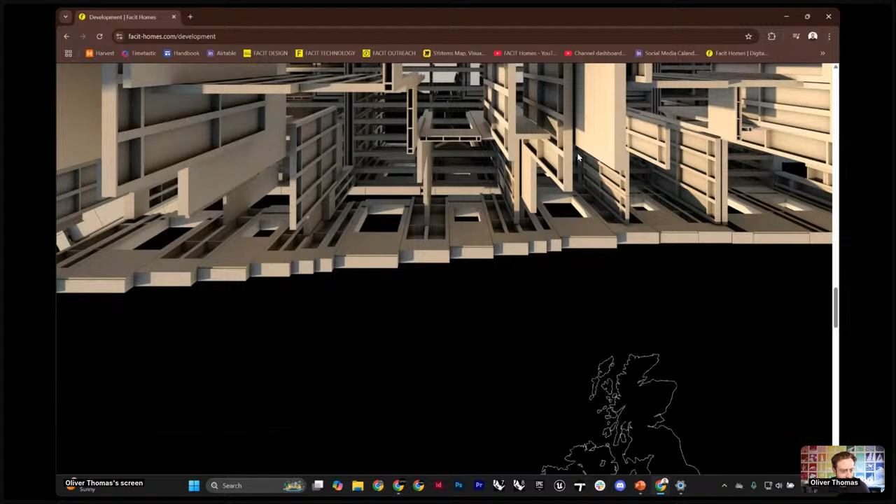That enables you to look at two sides of it now. So we have a homeowner side - we're continuing to deliver single one-off homes to consumers - but we also have a developer side where you can find out a little bit more about some of those projects we showed today, some of the things we have in the pipeline, our capabilities, the new microfactories, and the build process. You can find out more about how we build and the systems we build with, which is all released as of Friday, right, Bruce?

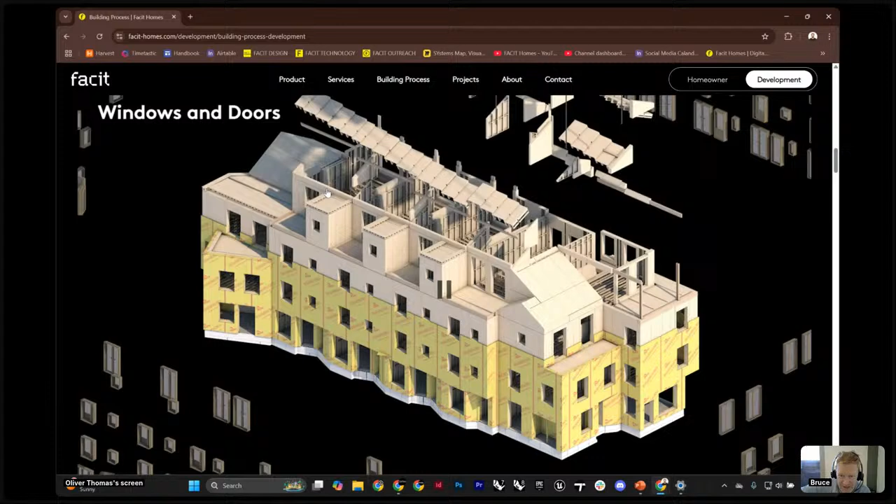Yep, that's right. New look, new brand. We're now Facit as well, rather than Facit Homes, which is partly to clear up any confusion on the development side where we sound like a developer. Actually, Facit is now a little bit more precise because we don't necessarily sound like a developer ourselves.

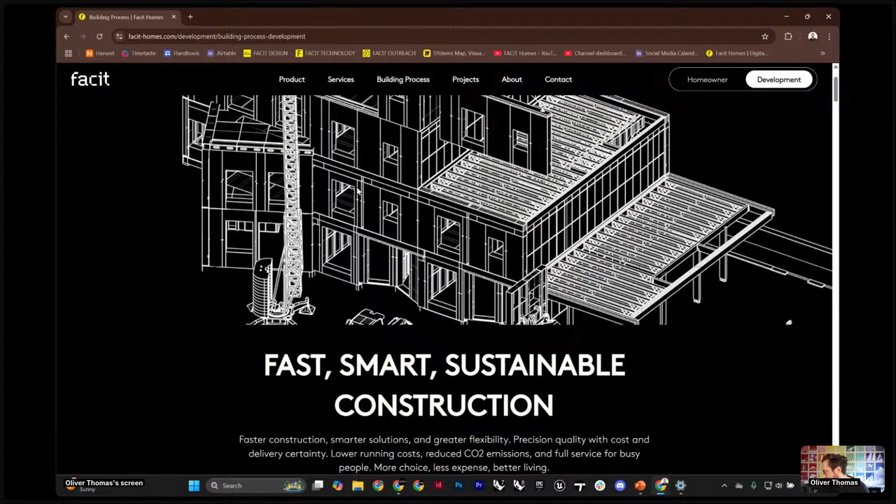There's one question here, which is: is the framing part of the assembly, or must the framing be built first prior to wall installation, or does it depend on the project scale?

I think basically the framing is the chassis - it's all structural load bearing. That's the part that we manufacture using the CNC machine. It's either made in small components, which are hand built into the project, or we stitch them together into bigger sub-assemblies, which are then craned into position. So really, in terms of the choice on that, it depends on scale. You need a bigger bit of infrastructure to build sub-assemblies, so you're not going to do it for one house. For our bigger projects, you would definitely do it because you want to reduce the working at height and the risks associated with that.